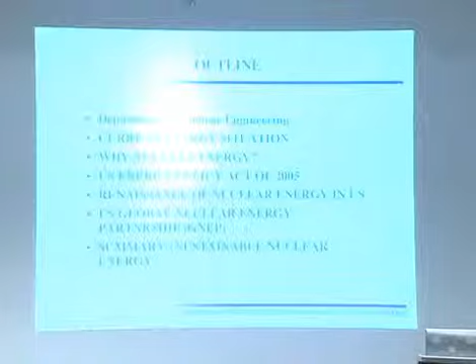I will try to cover a little bit about the Department of Nuclear Engineering, because we are the only one in California, so at least you should know a little bit about us. Then I will go over the current energy situation in the US as well as in the world, and try to convince you why we need nuclear energy. I'll look into what happened in 2005 with the new energy policy in the US. Hopefully the next administration will not turn everything upside down, which happened a few times in the past, so that's why we need a long-term energy policy in this country. I will talk about what happened after that, which I call the Renaissance in Nuclear Energy in this country, GNEP, or Global Nuclear Energy Partnership, and what is going on in the rest of the world. And a little bit of summary on what I consider when I say sustainable nuclear energy for a sustainable society. You hear all the time about sustainable society, but very little about sustainable nuclear energy.

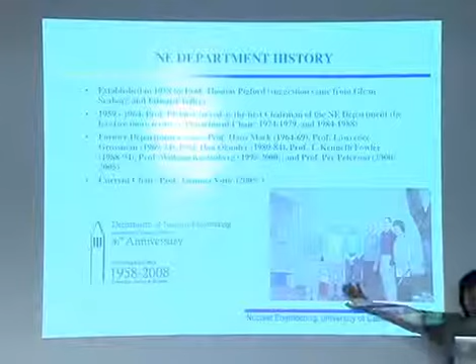This is just about the department. We are celebrating our 50th anniversary this year, and we have one of our faculty here, Professor Olander, sitting in the back, who is also celebrating 50 years of service to UC Berkeley. So these are the different chairs of the department. I just took over in 2005.

As you can see, two famous people from Lawrence Livermore and Lawrence Berkeley National Laboratories actually suggested in '58 that with two nuclear laboratories nearby, UC Berkeley needed to have a nuclear engineering department. We did have a TRIGA reactor in our basement, so most of you probably didn't know that. We are in Etcheverry Hall. Our underground laboratory is below Soda Hall, so they built Soda Hall on top of it. It is true, and we lost our parking place.

So we did have the TRIGA reactor until the late 1980s. It was decommissioned. The City of Berkeley was not happy with that at all, and we had a demonstration at that time. I was told, I came later. We still do have that containment structure that you can see here. You can visit us and see it. But we use it now for the largest rotating target neutron source, a deuterium-tritium accelerator that produces 14 MeV neutrons, pretty strong, 2 times 10 to the 11 neutrons per second per milliamp. We do have all kinds of other laboratories in Etcheverry Hall.

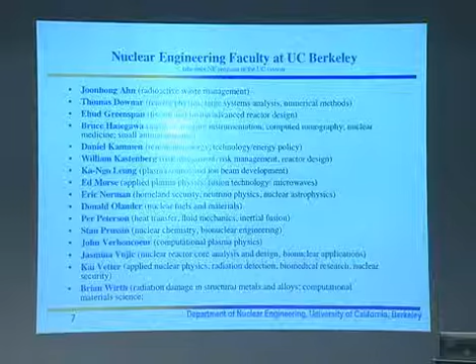These are our faculty, I will not go over them individually. They cover large areas that I listed on the second slide. So we are a small department, but we do cover all these different areas, and you are welcome to come. We have Monday colloquia, and those are pretty interesting as well. So it goes from fusion and fission energy to fuel cycles, radioactive waste, materials, risk safety, nuclear thermohydraulics, bionuclear engineering as well, and medical applications of radiation.

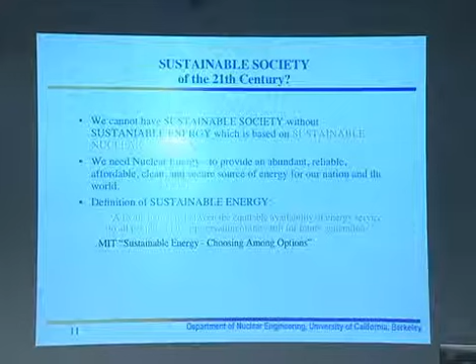From my point of view, we cannot have a sustainable society without sustainable energy, and sustainable energy cannot avoid having nuclear energy, something I call sustainable nuclear energy that can produce cheap, abundant, secure energy, both for us and for the rest of the world. You can read the definition of sustainable energy that I found in MIT's book on sustainable energy, choosing among options. So we do need energy.

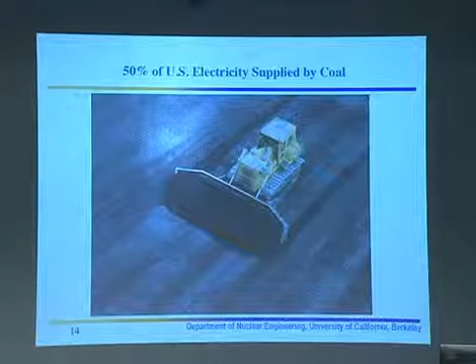Let's see the prediction by the Department of Energy in this country. By 2020, we might need 44% more electricity just for the US. What is our current situation? 50% of electricity is supplied by coal, which is the dirtiest technology so far.

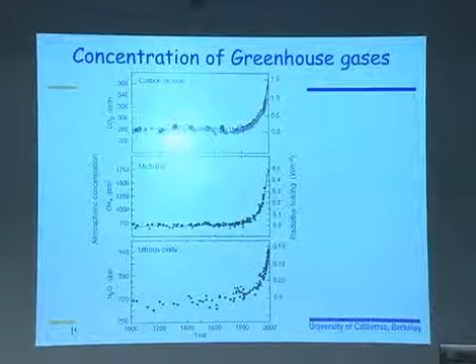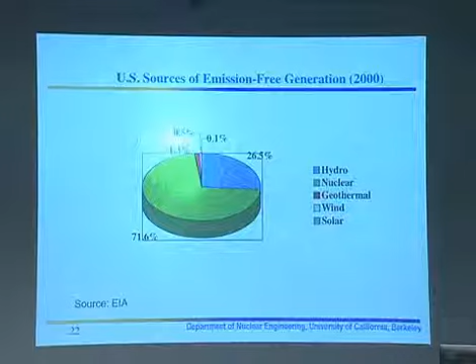This is the current picture in the US that I already mentioned. If we include only sources of electricity that are emission-free, we get a different picture: almost 72% is nuclear, then hydro, geothermal, and very little wind and solar. So those advocating replacing everything with renewables must think about this, because the only baseload electricity production sources are nuclear and coal. If we could replace those two with renewables, I would be very happy, but it is not possible.

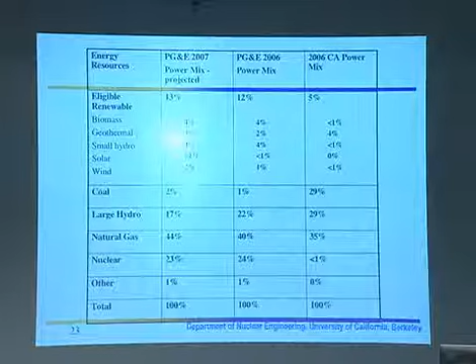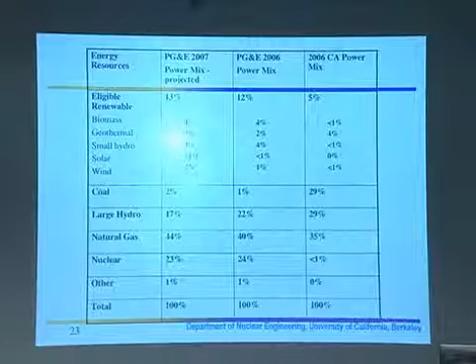This is the picture in California. If you look at your PG&E bill every month, they include flyers explaining this structure—so-called eligible renewables that include biomass, geothermal, small hydro, solar, and wind. The rest, as you can see, PG&E has reduced coal, increased natural gas, and nuclear is a large percentage of PG&E's mix of electricity.

California is the only state that has a ban on construction of new nuclear power plants. It's in the law—something like no new nuclear power plants could be built in California before a permanent solution for radioactive waste is found. Having in mind that Yucca Mountain is still not constructed, which I'll talk about, we still have that ban. I was in Sacramento just ten days ago, a week from last Monday, testifying in favor of nuclear energy.

One California Assemblyman, Chuck DeVore, is trying to push bills to remove that ban. This is the second year he's trying. Last year, Per Peterson went there; this year, I went there. The chair of the Committee on Natural Resources is Loni Hancock, former mayor of Berkeley. Her husband, Tom Bates, is now mayor of Berkeley, so they just changed roles—she went to Sacramento, and he came to Berkeley. So as long as they're there, nothing will change. I don't want to say anything else.

But this is the mix for the rest of the world. You can see that in most countries we have 20 to 30% of electricity production from nuclear. In France, it's up to 80%. However, in Australia, 92% is coal.

Australia is very rich in terms of uranium. 40% of world reserves of uranium are in Australia, but they're just building their first research reactor, the Opal reactor, so we will see how it will go.

So this is the picture of the rest of the world. You see North America, Europe, and Japan and Korea mostly. These are developed countries, and developed countries do rely on nuclear energy, while developing countries now, like China and India, are going in that direction. In China, almost 99% of electricity is produced by coal, so it's very polluted, and it's also a huge question mark for the Olympic Games. I was in Beijing about 10 years ago, and it was very, very polluted. We will see what will happen.

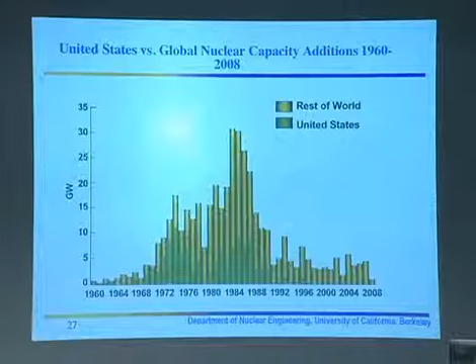This is a comparison of what went on over the last 20 to 30 years in the rest of the world. Yellow shows the rest of the world continued to build. In the US, we had two peaks, in the mid-1970s and 1980s - these are the dates when nuclear power plants started operating. After that, very little; we haven't constructed a new one for about close to 30 years.

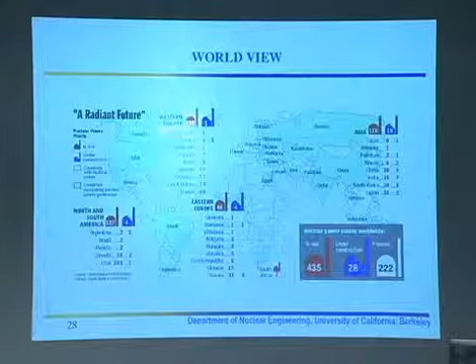This is the world view. Currently there are 435 nuclear power plants in the world, about 16% of world electricity production. 28 are under construction, and 222 are planned, mostly, as you can see on the right, in Asia. There is one in Europe, in Finland, now under construction. France will continue to construct, and a little bit in South America and the rest of Europe.

This shows the numbers and total percentage of generation. In the US, 20%; France, 78%; Japan, 25%; South Korea, 40%. So you see what the percentage is in different countries.

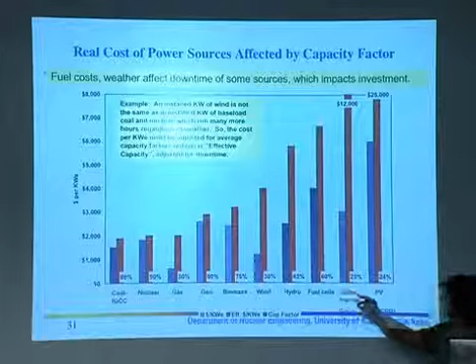When we're talking about renewables, I'm definitely for solar and wind. But if we want to include the real cost of power sources affected by capacity factor - meaning the percentage of time they're actually producing electricity during the day - you see that coal and nuclear are 80, 90% and over, gas is 30%, and hydro, fuel cells, wind and solar thermal or photovoltaic are about 25 to 30%. So it's still pretty low, and if we calculate this capacity factor and turn it into dollars per kilowatt electric produced, the price goes really up if your capacity factor goes down.

I invited Patrick Moore about a year ago to come to our department and give a talk - I don't know if anybody came, it was December, I think the 6th. As you know, he was a Greenpeace founder. He split with the Greenpeace movement about 15 to 20 years ago. During his talk, he showed pictures of himself as a radical from the 60s and 70s, long hair and whatnot, saving everything. He mentioned that he realized they were always against something and never for something, and that if they continued only opposing things, the only real solution would be to get rid of the human race - then all evils would be solved. That's when he split, and now he has his own movement.

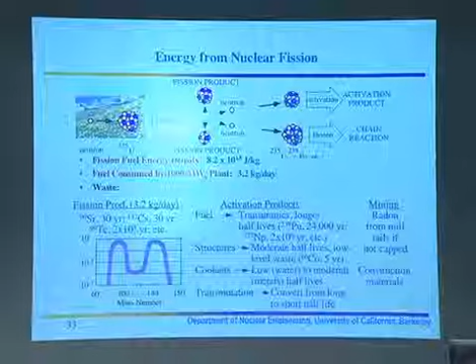It is about 70,000 metric tons of waste. But it is pretty small because of the high density of the fuel as well. So 3.2 kilograms per day. And these are different products, radioactive waste and whatnot that we deal with.

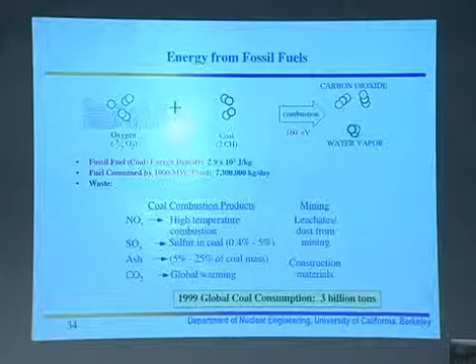In terms of energy from fossil fuels, energy density is 2.9 times 10 to the 7 joules per kilogram. So 10 to the 13, 10 to the 7, we have 6 orders of magnitude difference. And it immediately tells you what is the difference in coal that you need to have per day for the same 1,000 megawatt electric plant. And then here you have nitrous oxide, sulfur dioxide, ash, carbon dioxide that will also be produced. And people do not know ash is pretty radioactive because of natural constituents of coal as well.

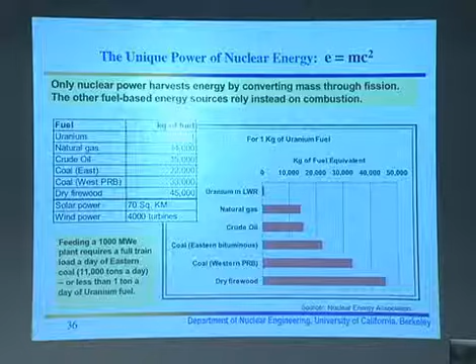So you will need 4,000 wind turbines to replace 1 kilogram of uranium. And you need about 70 square kilometers of solar panels to produce the same energy. So this is kind of the difference in energy density. So this is one fuel element that you have, and you have the train of coal.

So with all of that, and with all kinds of issues in importing gas and oil and instability in the world, and the need to have energy independence and energy security in this country, in 2005, Congress, after 5 years of infighting, finally came up and proposed and accepted a new energy bill. And these are some of the issues that contributed to that particular decision-making process. So let's see what is in it.

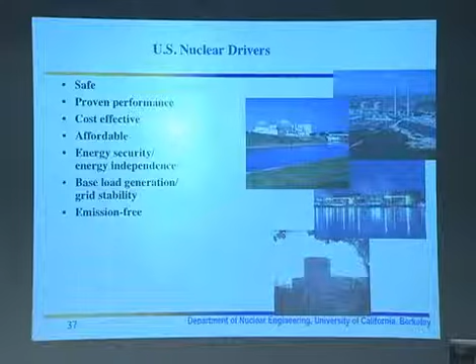So we are very much behind the rest of the world, and even if we were to start constructing right now, we have all the permission and let's do it, we don't know how, because we lost the ability to basically construct nuclear power plants in this country. So we need to get a reactor vessel from Japan. Japan is now the only country that could do that. So there is a long waiting list of different countries trying to do that.

In addition, we had 2 vendors, Westinghouse and General Electric. They haven't constructed anything in this country in 30 years. They were going around the world and doing that. Now Westinghouse, the nuclear part, has been sold to Toshiba, and General Electric and Hitachi are working in collaboration. So in any case, Japanese companies will be building new nuclear power plants in this country.

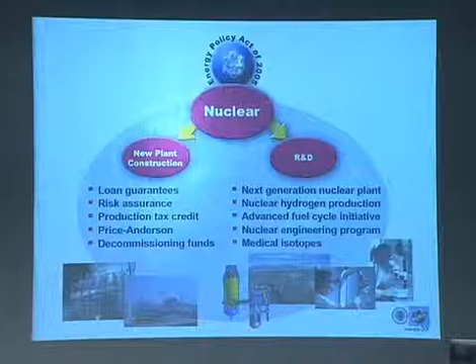Basically, if we could close the fuel cycle by introducing recycling and reprocessing, that this country did not do since Carter times. President Carter basically said no reprocessing, no recycling. We will not do that. We will have once-through fuel policy, meaning you have fresh fuel, you take it out and you store it somewhere. Other countries, including France, Japan, China, Russia, Great Britain, they do reprocessing and partially recycling, but we didn't do it. So that has been changed.

Also, nuclear engineering programs, because the field was neglected, new people were not coming into the field. So now we have a huge problem. Everybody is trying to hire nuclear engineers, but there are not very many of them. A lot of them retired in the previous years. Now both Westinghouse and General Electric are hiring new people. Westinghouse hired 900 engineers, not only nuclear, but including nuclear, last year. And I got a list from them that in the next 5 years, they will need 500 engineers per year.

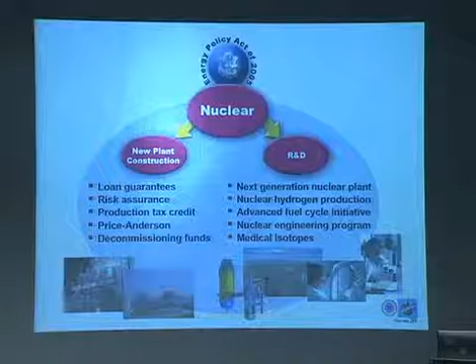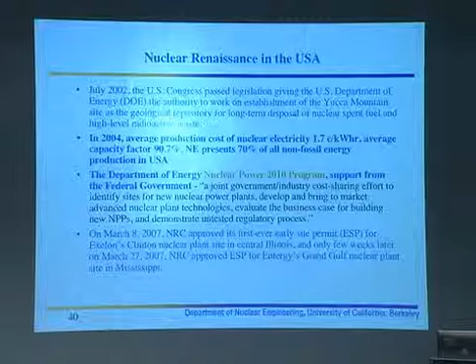Nuclear Regulatory Commission, because of all the applications for license that are coming through, they're hiring 300 engineers at this moment, including national laboratories and whatnot. Also, medical isotope production, we have a lot of problems in domestic production of medical radioisotopes, because this country shut down almost all research reactors over the last 30 years. During the dry period of, let's say, Clinton administration, about 50% of nuclear engineering departments were shut down because there was no support for them. Research reactors were shut down, no support from Department of Energy, and suddenly, when we need it all back, we cannot produce enough nuclear engineers in these times.

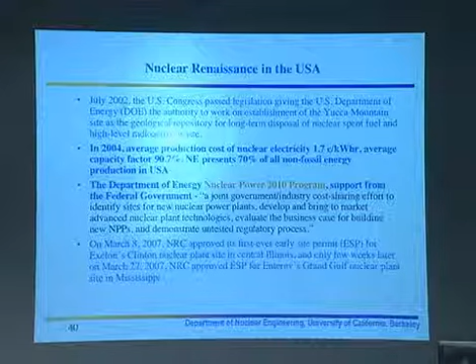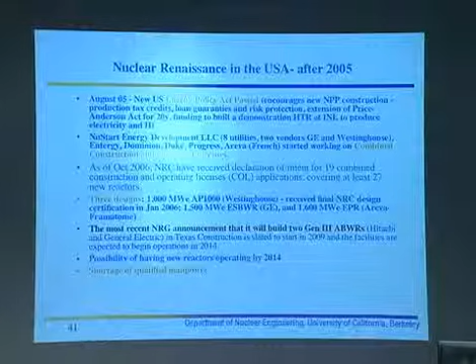So I will not go over all these different details, but just to point out that in March of last year, Nuclear Regulatory Commission approved its first ever early site permit for Exelon's Clinton nuclear power plant site in Illinois, and only a few weeks later, they also approved the early site permit for Entergy's Grand Gulf nuclear power plant site in Mississippi. So what is good in this case is that many licensed nuclear sites have space for more nuclear power plants, meaning the license was for more than one, maybe two, maybe 4, 5 nuclear reactors. However, because of the problems in the 70s and 80s, they were not constructed, but they still have the license. So they don't need to go through the painful process from 30 years ago to fight with local groups of concerned citizens that were suing everybody.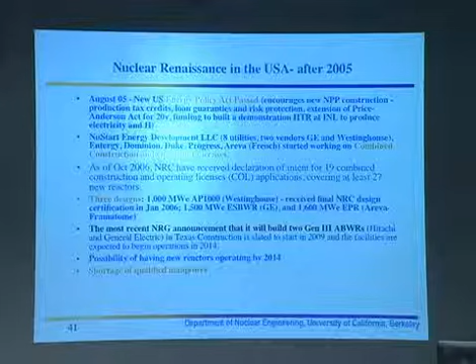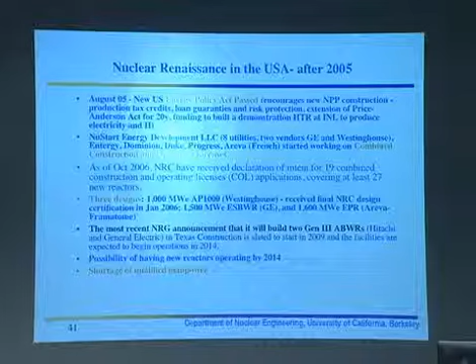So since the Energy Policy Act of 2005, the nuclear industry suddenly woke and realized that there is a potential of huge profit for them. So they started all kinds of different consortia. There are probably 10 by now. And starting in October of 2006, they started announcing that they will submit applications for the so-called combined construction and operating license. At that time, there were 19. By now, there are 36. And I will show some of the sites. There are mostly 3 designs that I will show.

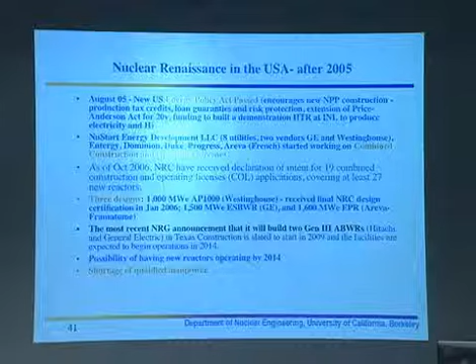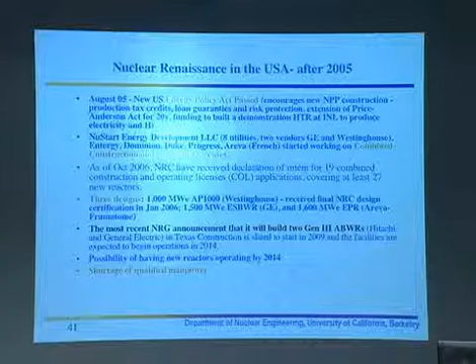One is the new design by Westinghouse, which is the 1,000 megawatt electric AP1000. It has design license. It got it about a year ago. Not a single one was built in this country, but having in mind that Westinghouse nuclear part was bought by Toshiba, and Toshiba bid in China and won, they might build 4 of these, first in China and then maybe in the US. GE has this ESBWR, which is 1,500 megawatt electric. And we have the French company Areva, which is very active, and they want to build the European-type EPR reactor. These first two are so-called passive safety generation 3+ reactors. EPR is still an active safety generation 3 reactor.

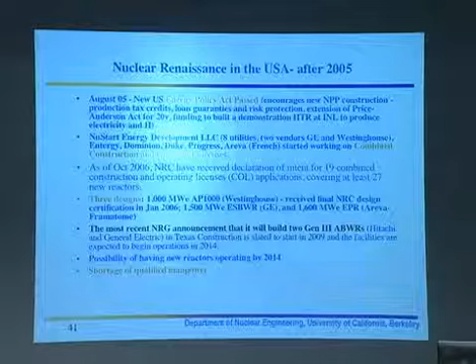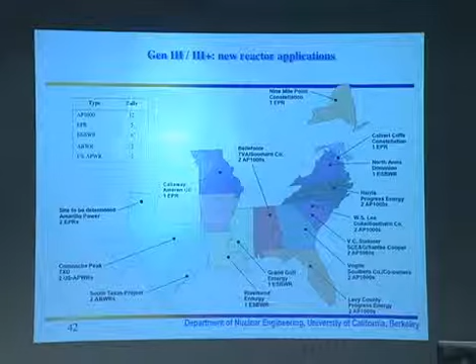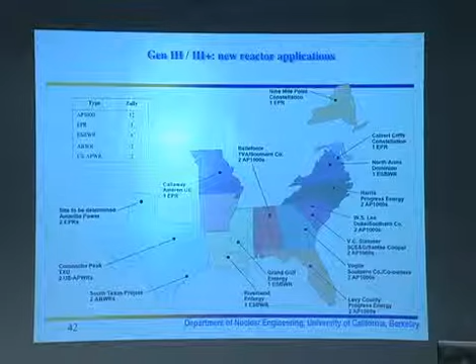And also a company from Texas, NRG, wants to build advanced BWR reactors that were already constructed in Japan. So probably that might be the first one to be constructed. And my estimate is, if everything goes as predicted, because NRC is required to process a license within 3 years from the moment it is submitted, maybe we will have some new reactors operating by 2014. So these are some of the current sites. And you can see AP1000, 12 of those, EPR 5, ESBWR 6, and some of the generation 3 reactors are also being planned. So mostly east and southeast part of the country, not much on our side.

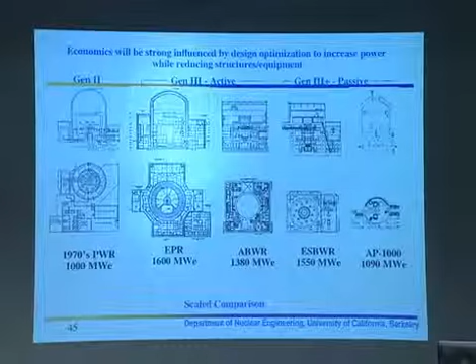So this is to show you what the differences are in different types of reactors. On the far left, you have generation 2. These are mostly PWR and BWR reactors that were built in this country. Then you have generation 3 with active safety, so you have all kinds of active safety mechanisms. This is French, which is being built in Finland at this moment, and the advanced BWR reactor, several of which were built in Japan, Taiwan, and around the world.

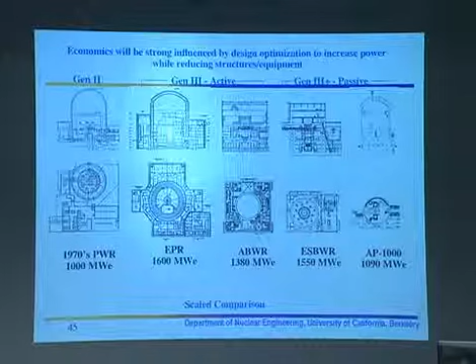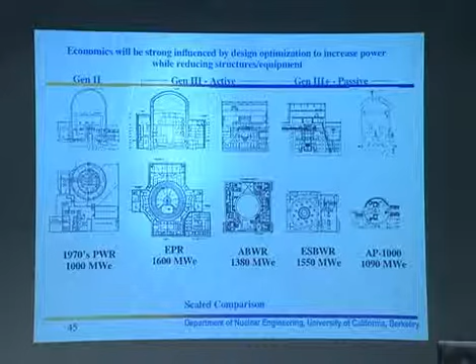And these are generation 3+ passive safety types of reactors. You see how small they are? Much smaller because they're using either natural circulation or different types of passive safety mechanisms. So you don't need to have huge active safety, as you can see in the EPR reactor. Passive safety means that you are using physics, more or less, to shut down the reactor if any of the factors, temperature or power, increase beyond what you predict.

So this is what I already mentioned for GNEP. But what is important in GNEP is basically the advanced nuclear fuel cycle. We want to close it so that very little actually goes underground. We want to reprocess spent fuel, take out whatever is still useful and put it back and burn it in different types of reactors, such as burning plutonium and all kinds of minor actinides, use nuclear power to produce electricity and hydrogen, and come up with new designs for the next generation.

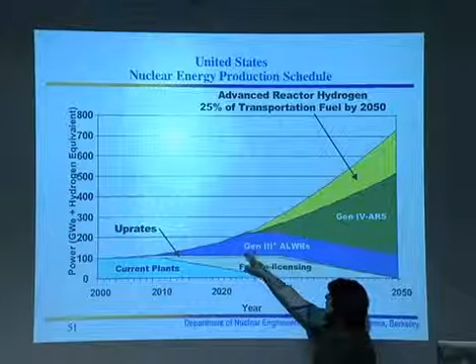So if we don't do anything, our current plants will slowly shut down starting 2010 because their licenses will expire. If we have full relicensing, then they might continue for another 30 or so years. If we start building generation 3 reactors, this is the picture, and then with generation 4, and then using hydrogen for transportation, this is additional power that we could add.

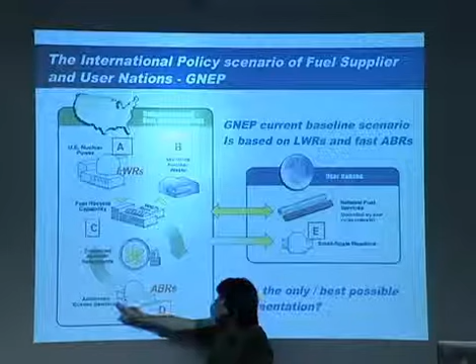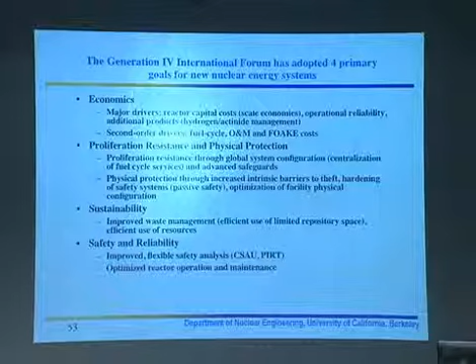So countries that do have nuclear technology will provide fuel and reactors, take back spent fuel, and then do recycling and reprocessing, and include something called advanced burner reactors to burn all those long-lived radioactive nuclides that should not go underground. So this is what generation 4 nuclear reactors should do in terms of economics, proliferation resistance, sustainability, and safety and reliability.

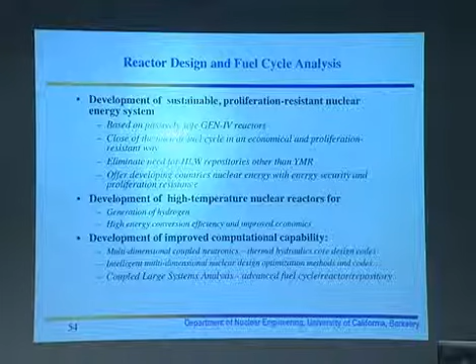If we go to much higher temperature, efficiency of thermal to electrical will go up to maybe 50 to 60%. And also, at high temperatures, the outlet temperatures will be high enough for hydrogen production. This is some additional thing that we need to do. So generation 4 was discussed on an international level. Many countries were involved, and they have chosen these 6 types of reactors to be developed in this next generation. Several countries took the lead and picked different types of these reactors.

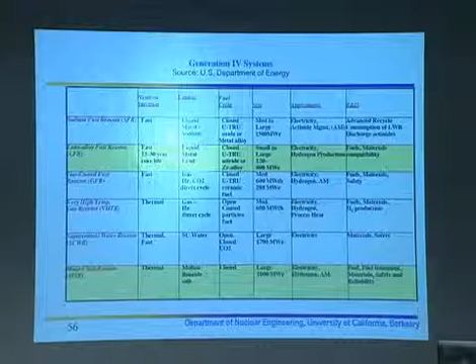And I will show in a minute a diagram. So this is the diagram of 6 types of generation 4 reactors, including sodium fast reactors. Some of them are fast, some of them are thermal. Fast and thermal basically talk about the dominant energy of neutrons inside of the nuclear reactor.

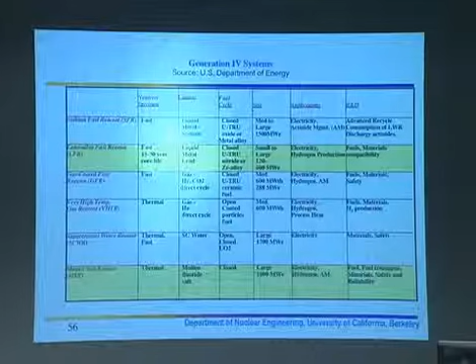Sodium, as you can see, is the coolant, so what we are using to cool off the fuel. So this is liquid metal. We have gas as well, so these are gas-cooled reactors, very high temperature gas-cooled, and so on. We still have water-cooled reactors and molten salt-cooled reactors. Again, application could be for electricity production, for minor actinide burning as well, plutonium burning, electricity or hydrogen production, process heat. We could also use the heat for all kinds of purposes.

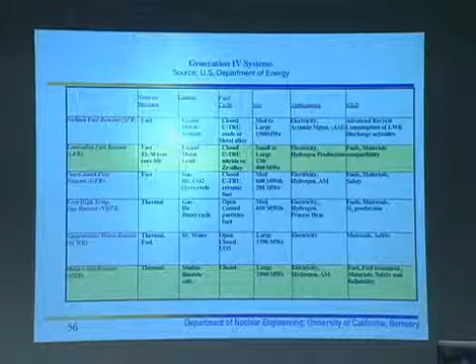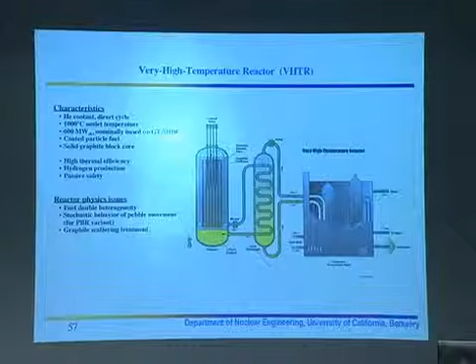And some of the research and development that will be needed, particularly materials at so-called extreme conditions, including very high temperature, high pressure, as well as high radiation fields. So we still need to do a lot of work in that particular area. And I will just show a few of those. So this is very high temperature reactor. This is one of the favorites for this country.

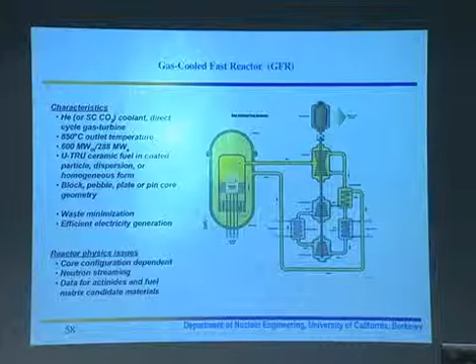Another one, this is gas-cooled fast reactor. So you have the characteristics; I will not go over that. But what is interesting: the fuel are small coated particles, about 1 millimeter in size. Because fuel is in the middle and it's surrounded by ceramics, it could sustain extremely high temperatures.

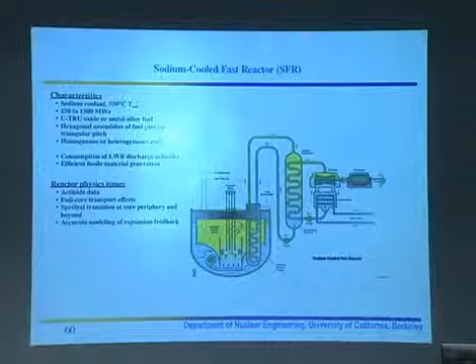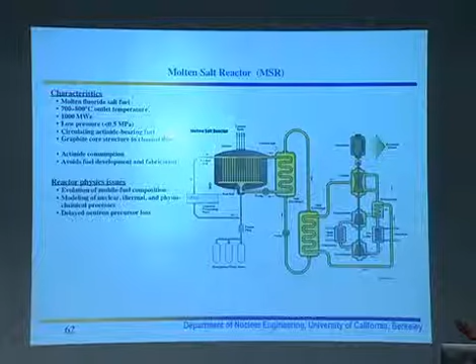This is sodium-cooled fast reactor, which is also envisioned for minor actinide and plutonium burning. And let me just go quickly over supercritical water reactor and molten salt reactor. We do have in our department another group, including Professor Peterson, who is working on molten salt type of reactors with fuel in form of pebbles. So you have floating pebbles, and this is also a very neat design because of the high temperatures that it can sustain.

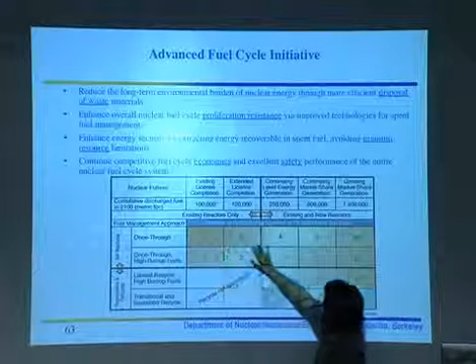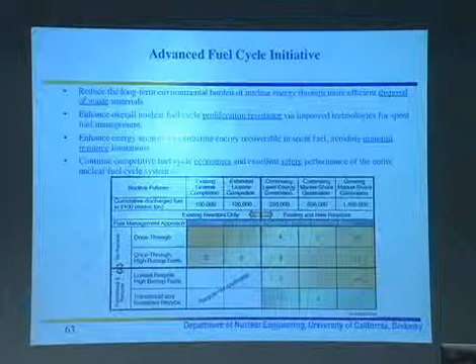So in terms of advanced fuel cycle, recycling and whatnot, if we have this once-through type of policy, which was no recycling, just take spent fuel and put it in an underground repository, you will see how many repositories we would need to build if we were to include construction of new nuclear reactors. We had problems building one. It is taking more than 30 years of fighting, mostly political fighting. So imagine if we were to build another one and another one, it would never happen.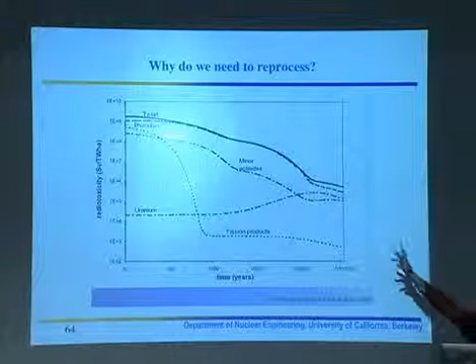So if we recycle and reprocess and burn these minor actinides and plutonium, we would need only one repository regardless of the number of reactors that we might build. Why? Because what we will be putting into the repository will be just fission products that will decay in a few hundred years, instead of uranium and plutonium and minor actinides that could be active over a very, very long period of time.

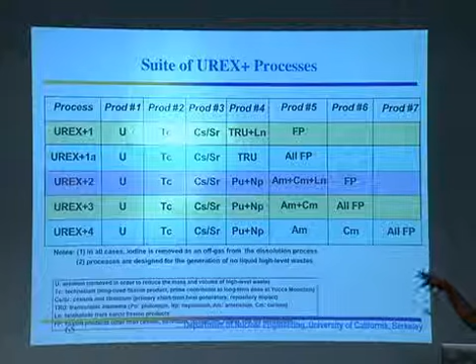So these are some of the processes that are under development in this country. The one that is almost chosen is UREX 1A, in which uranium is separated, technetium, these are some of the products, and plutonium. The issue in this country is no separation of plutonium. There is the PUREX process, and almost every other country is using that one, but it does separate uranium, it does separate plutonium, and everything else stays together. So it's not politically correct in this country to do that, so we have to develop a new process.

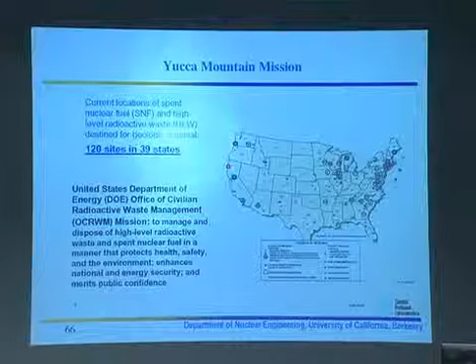In terms of Yucca Mountain issues, currently we have 120 sites in 39 states with spent fuel distributed across the country. Okay? If safety is an issue, I think it's much better to have one place in which we store all that spent fuel. So there was all kind of fighting about Yucca Mountain. A lot of money was spent on that.

Nevada Senator Harry Reid will basically do everything in his power to stop construction of Yucca Mountain. However, this is the milestone and outline. So the Yucca Mountain project has been accepted and supported by the Congress. The President signed. DOE is just about to submit the application for license to the Nuclear Regulatory Commission, probably sometime in June.

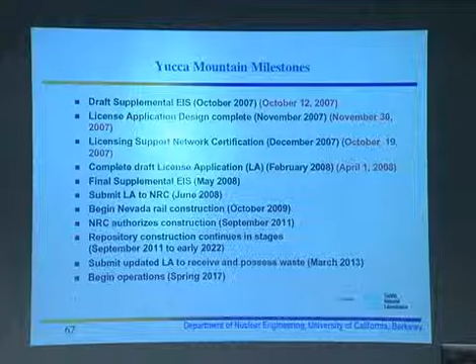And then everything is up to NRC, so we expect in the time frame of 3 years that NRC will review it and give permission for authorization for construction, and this is the rest of the story.

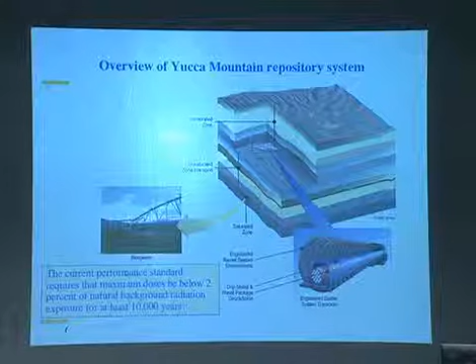So in terms of what we have in Yucca Mountain, okay, so this is the site. It's very dry, and the tunnels are drilled inside of Yucca Mountain, and this is kind of the system, drip shield, waste package that will be packed. And right now, the application for license is submitted assuming that there is no reprocessing. So the packages will be just packed on the ground. But if anything changes, it will be very different.

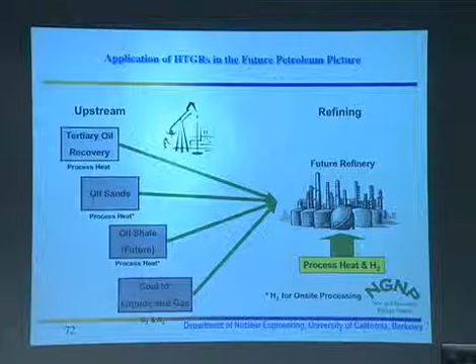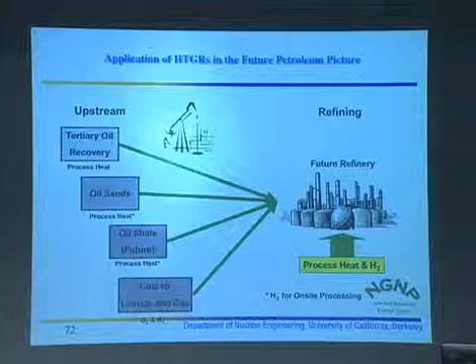What is also interesting, and you probably heard about issues with oil sands, oil shale, and whatnot up in Alberta in Canada. So process heat from nuclear power plants could be used to actually melt that oil from sands or shale and just pump it. Also, it could be used to process and produce hydrogen that is also needed for future refineries, thus reducing reliance on natural gas, which is very expensive.

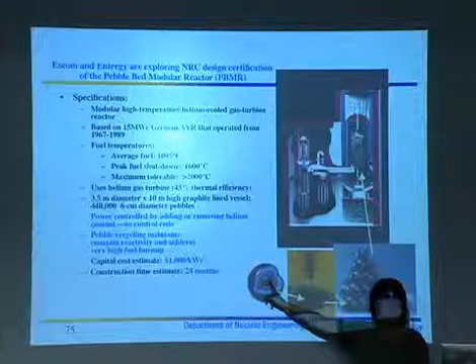So this type of high-temperature reactors could be used for electricity production, for heat, and for hydrogen production. They could use all kinds of fuel and could be used for reprocessing of fuel and burning. These are TRISO particles, and I have the picture of it. So this is 1 millimeter in diameter TRISO particle, fuel in the middle. These are different layers of ceramics.

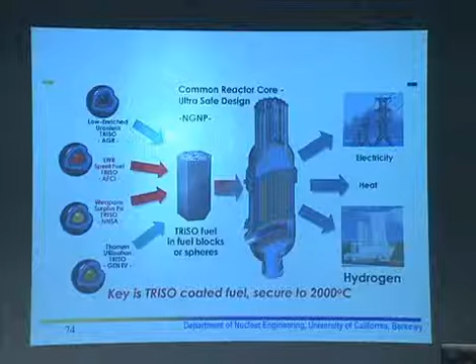So you put many hundreds of thousands inside of this pebble, which is about 6 centimeters in diameter, and then you place it in the reactor core. So it's cooled by gas in this case. So it's a very interesting system. It has 45% thermal efficiency. It can go to very high temperatures. The other US type, the General Atomics type of design, includes instead a graphite block, which is a moderator, and then these particles are stuck in some type of cylinders.

This is the idea how to use these high-temperature gas-cooled reactors to produce process heat, hydrogen, and electricity. So you have the nuclear power plant, you have electric power going in one direction, you have process heat, you have high-efficiency hydrogen production, and then you have hydrogen distribution infrastructure in one place. This is the timeline for the hydrogen initiative. Hopefully, nuclear energy will be included in that.

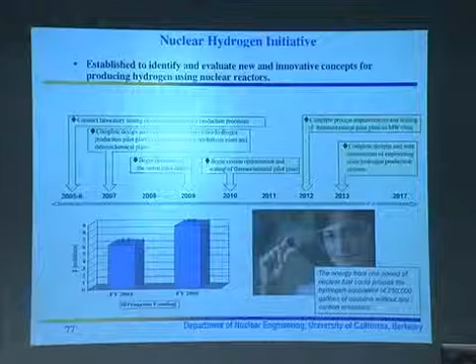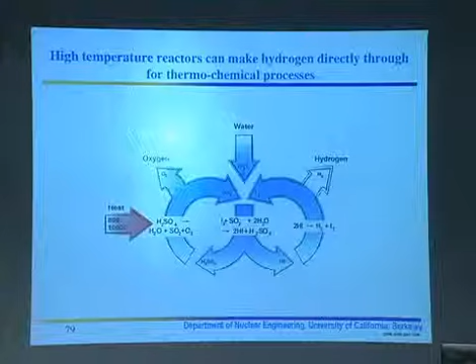And let me just show that thermochemical process. Okay, so this is hydrogen production. It's still under research and development, in both Idaho and General Atomics. So you need to have 800 to 1,000 degrees centigrade of heat. You need different types of chemicals that are mostly recycled. You need water, and then you produce hydrogen and oxygen in this process.

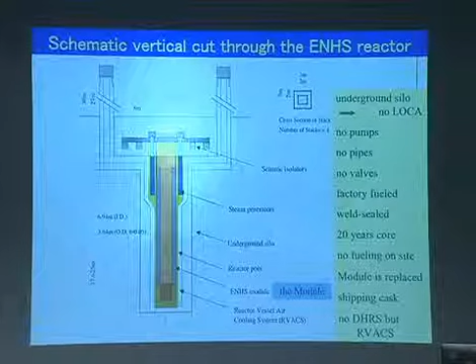And I will just say a minute on these small-scale reactors I already mentioned. So this is the one that has been developed in our department. So very simple design. No pumps, no pipes, no valves, factory fueled, sealed, at least 20 years of core life, no fueling on site, and its small module could be up to 100 megawatts or so that is transportable.

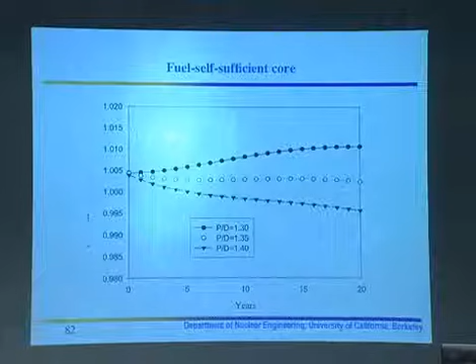So this is my vision of sustainable nuclear energy. Emission-free, safe, and reliable. We need to close the cycle. Just put basically fission products in geological repositories. This is also a new fuel cycle, which is proliferation resistant, and new simplified designs for the next generation of reactors, production of electricity, hydrogen, use for water desalination, district heating, and whatnot. And this is the end.